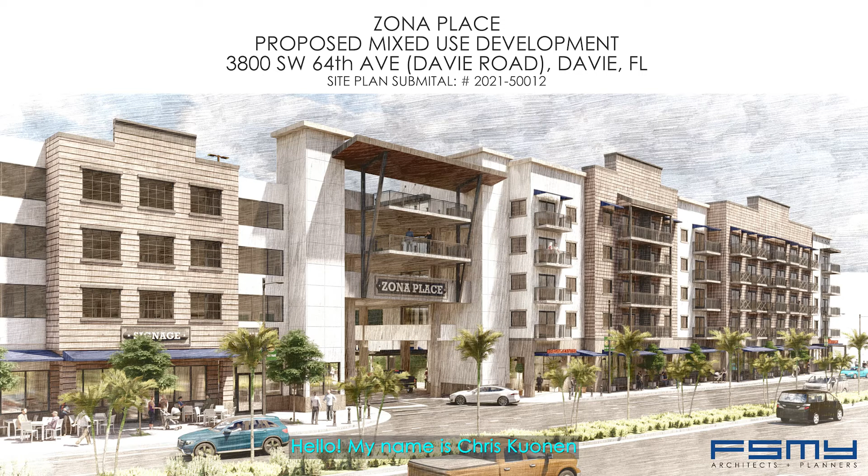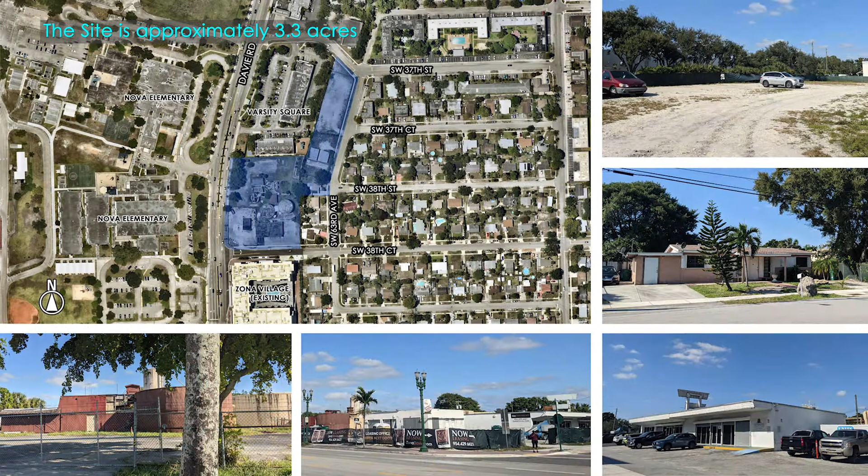The following project is designed for Ceiba Group for their site plan application request to the town of Davie to build a new mixed-use development on Davie Road. Located in the town of Davie's Regional Activity Center zoning district, the project fronts a transit-oriented street and is also in the Western Design Theme District. The department review number is 2021-50012. The project team includes FSMY Architects, Pillar Consultants for Civil Engineering, Traffic and Landscape, and LeMay Escobar for Interior Design. The site is approximately 3.3 acres and is located on the east side of Davie Road between Southwest 37th Street and Southwest 38th Court.

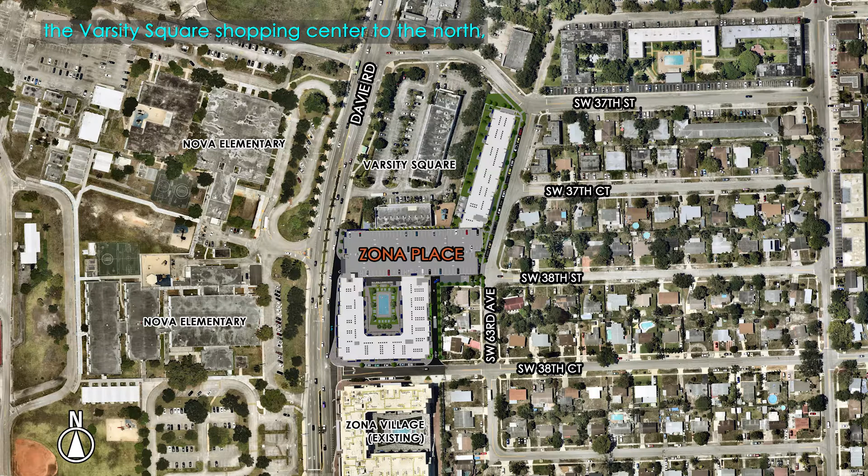The southern and middle portions of the site currently contain some structures, including the town's decommissioned sewage treatment plant, a one-story commercial building, a single-family residence, and two metal storage buildings, which are all scheduled for demolition and removal. The northern portion of the site is currently vacant. The property is bounded by the Zona Village mixed-use development to the south, Nova Elementary and the South Florida Education Center to the west, the Varsity Square Shopping Center to the north, and a single-family residential neighborhood to the east.

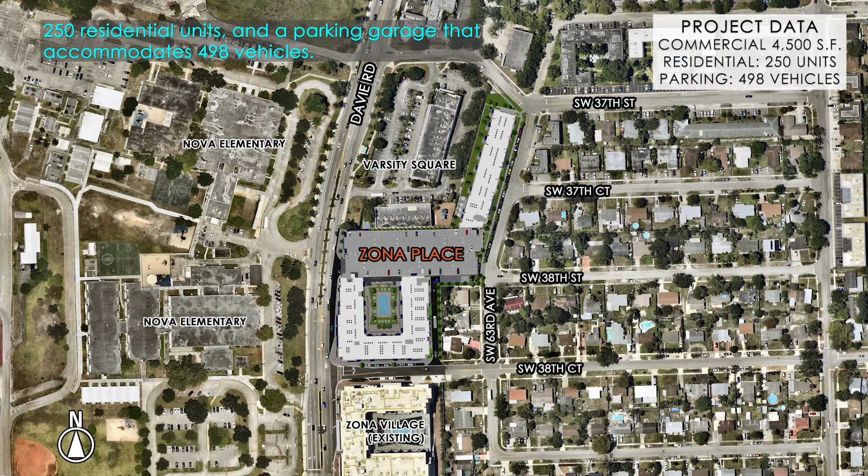The proposed Zona Place mixed-use development includes 4,500 square feet of restaurant and retail space, 250 residential units, and a parking garage that accommodates 498 vehicles. Designed as three interconnected buildings, Building A contains 173 apartments, resident amenities, and a central courtyard pool. In the middle is the parking garage with commercial retail facing Davie Road, and to the north is Building B, a residential building with 77 apartments and outdoor amenities.

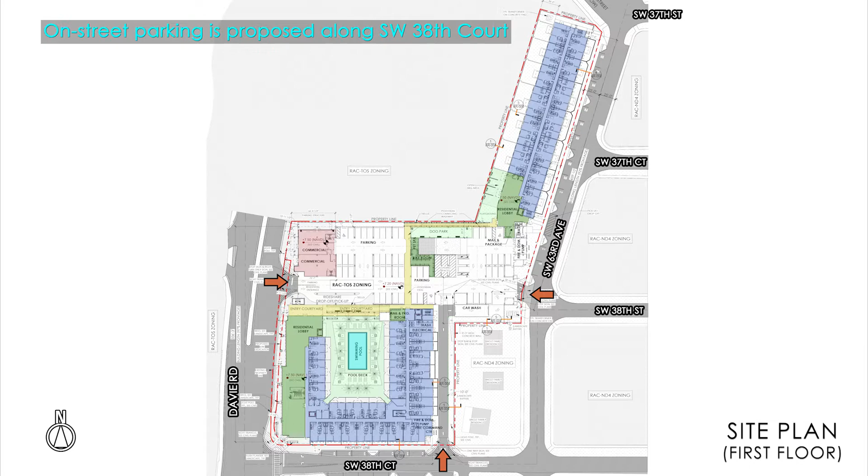A vehicular driveway access and turn lane is proposed from northbound Davie Road into the west entrance of the parking garage. A second driveway access is proposed on Southwest 63rd Avenue into the east entrance of the parking garage, and a service alley is proposed on Southwest 38th Court. On-street parking is proposed along Southwest 38th Court and along Southwest 63rd Avenue.

Building A contains resident amenities including a lobby, clubhouse, and gym along the west side with large storefront windows facing Davie Road. Apartments make up the remainder of the first floor. Commercial retail spaces lie on the west side of the parking garage fronting Davie Road. The west garage entrance leads to a motor court pull-off area inside the garage. To the north and east is parking for the commercial tenants.

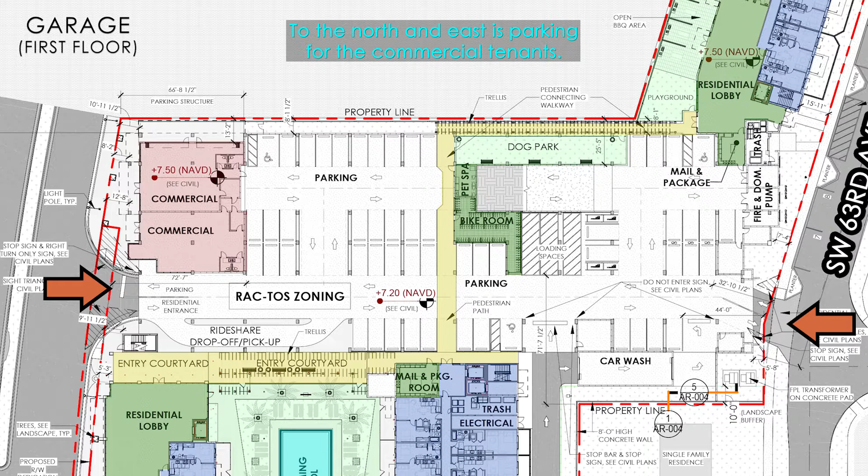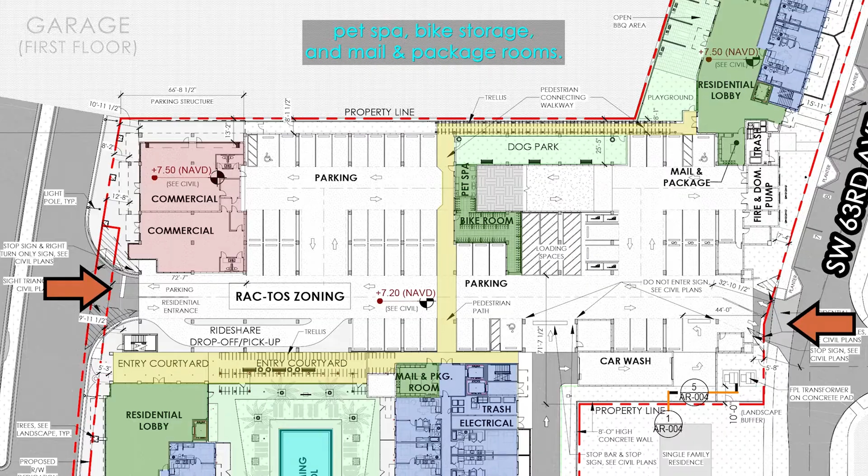Electric vehicle charging stations are also provided. Trash service and dedicated loading areas are inside the garage, concealed from the neighborhood and public right-of-way. A pedestrian path inside the garage, also known as the Yellow Brick Road, connects the two residential buildings with lush landscaping and covered trellises at each end. Resident amenities along the path include a dog park, pet spa, bike storage, and mail and package rooms. Building B amenities are located at the south end and include an outdoor playground and barbecue area. Ground floor apartments have large private courtyards.

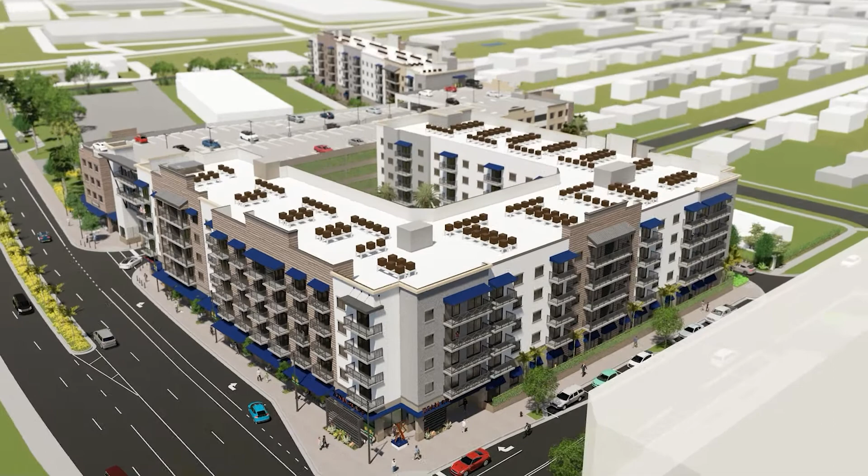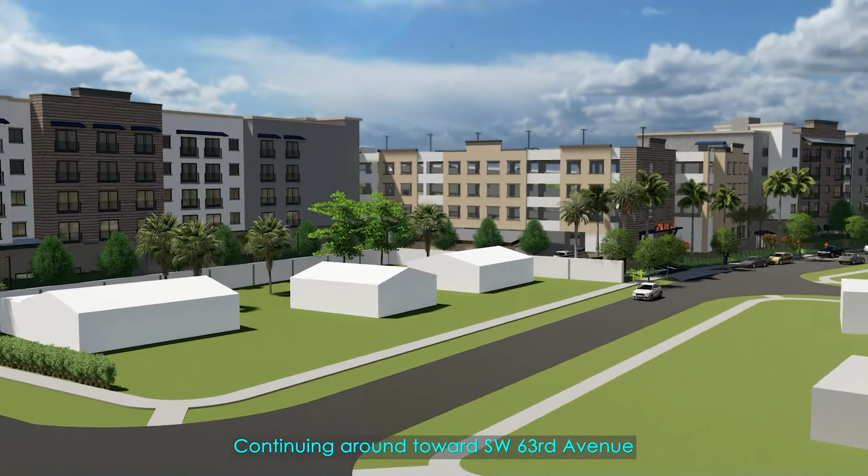Looking north, we see Davie Road and Nova Elementary to the left. The residential building A is in the foreground, with the parking garage just beyond. Continuing around towards Southwest 63rd Avenue is the east entrance to the parking garage and east side of the residential building B.

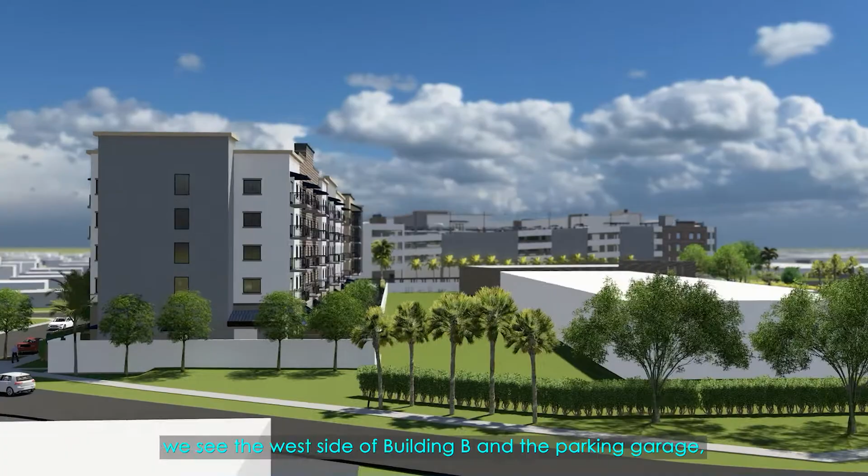Moving back towards Davie Road, we see the west side of Building B and the parking garage as they face Varsity Square. And finally, heading south down Davie Road, we approach the west side of the project with the retail and garage on the left and the residential Building A on the right.

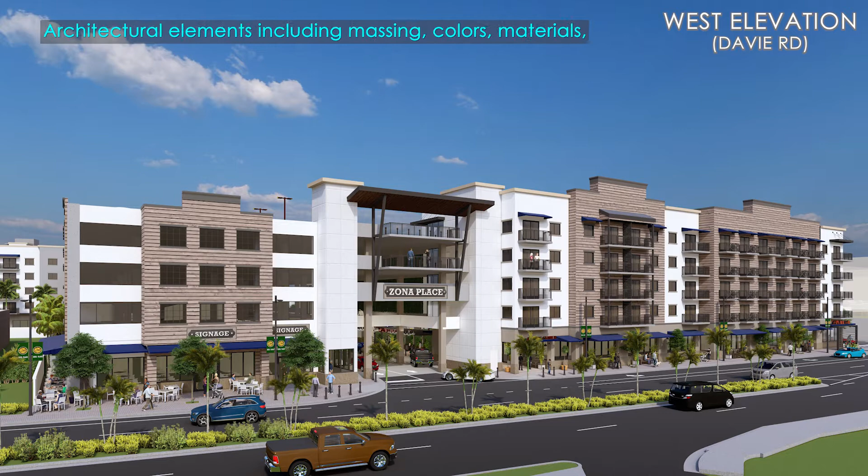In keeping with the requirements of the Western Design District, architectural elements including massing, colors, materials, and textures are used on the facades to evoke the decorative false fronts of Western buildings. Wall materials are heavier at the base with darker paints and simulated finishes. They lighten in texture and color as they move up the elevation. The tops of facades end in tall step parapets capped with cornices which also serve to screen the flat roofs and mechanical equipment beyond. Decorative shed roofs are finished in a standing seam metal roof type material.

Wide public sidewalks line the western edge of the property along Davie Road, creating pedestrian connectivity to the adjacent properties north and south, and providing access to the commercial tenant spaces and pedestrian entry courtyards within the project. The west side of the property is further enhanced by various street trees, and sidewalk and street lighting improvements are consistent with the newly developed projects to the south.

In addition to our request for site plan approval, we are also asking for a variance request. The zoning for the site, RIC-ND4, on a transit-oriented street, allows for an incentivized maximum of 4 stories and 55 feet in height. We comply with the maximum height allowance of 53 foot 8 inches, but an additional floor for a total of 5 stories is needed to make this a viable project.

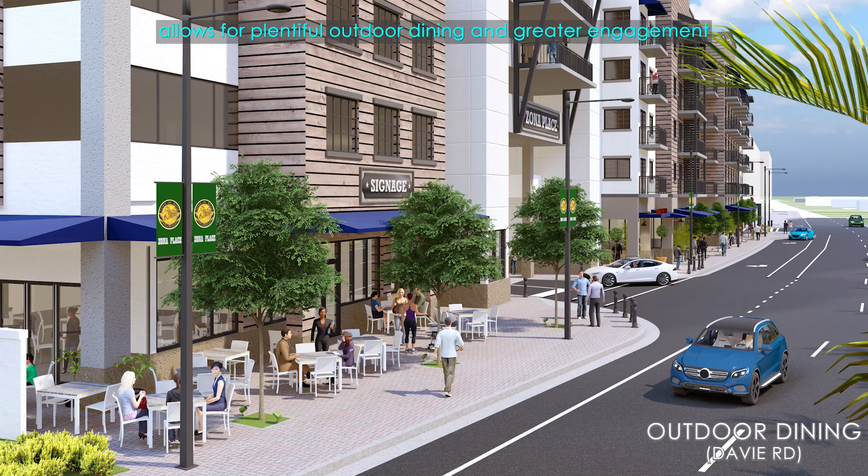The additional sidewalk width at this portion of the site allows for plentiful outdoor dining and greater engagement with the street-level pedestrian experience. Shade trees, street lighting, and deep awnings further enhance this experience.

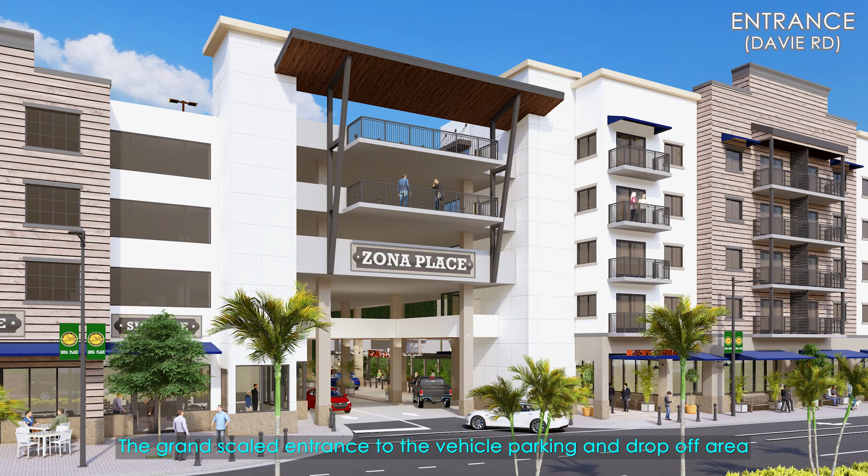The grand scaled entrance to the vehicle parking and drop off area is centered between the retail and residential uses and is adjacent to the main pedestrian courtyard and lobby entrance to its right. Large ground floor storefront windows along Davie Road maximize indoor outdoor connectivity to create an inviting environment for patrons and serve to activate the building from the street.

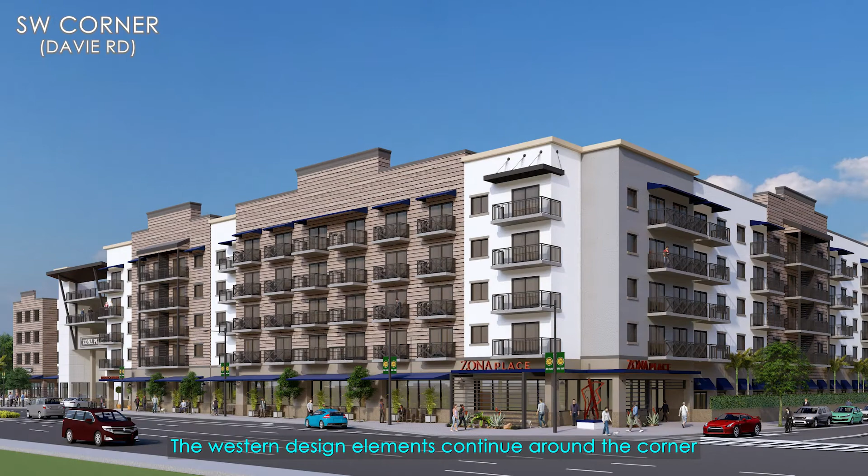The western design elements continue around the corner to the south facade of the building. Some of these design elements also occur on the Zona Village project to the south, creating a dialogue and continuity between the two projects. Resident balconies along the west and south facades help to enliven and bring movement to the upper floors of the building.

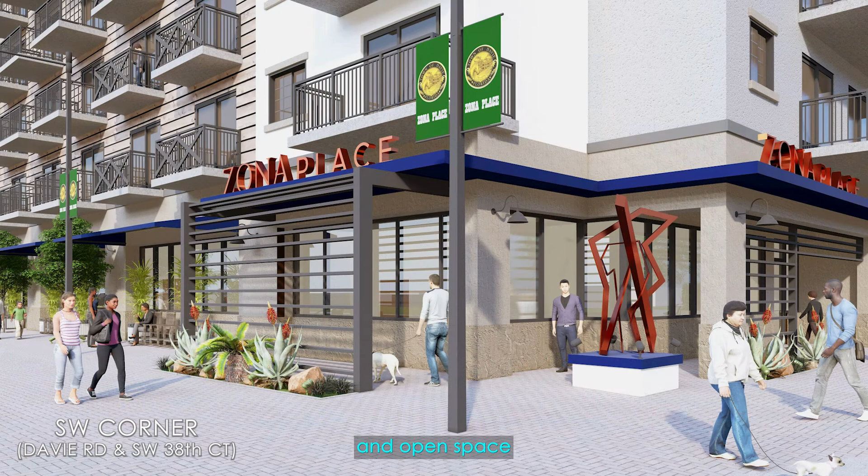Large ground floor storefront glass wraps this corner of the building and continues east along the public corridor. There's additional sidewalk width and open space at this corner of the project where Davie Road and Southwest 38th Court intersect. Unique overhang elements with project signage, wood screen walls, and additional landscaping create an enhanced covered pedestrian experience and unique design statement at this prominent corner of the project.

Space is also allocated here for future public art. New on-street parking is proposed along Southwest 38th Court.

Wide public sidewalks continue from the corner of Davie Road, connecting to the existing sidewalks in the adjacent residential neighborhood. An 8-foot-high concrete wall and a densely planted landscape buffer enhance the screening of our project from our neighbors to the east. The resident parking garage entrance seen on the left is surrounded by lush landscaping.

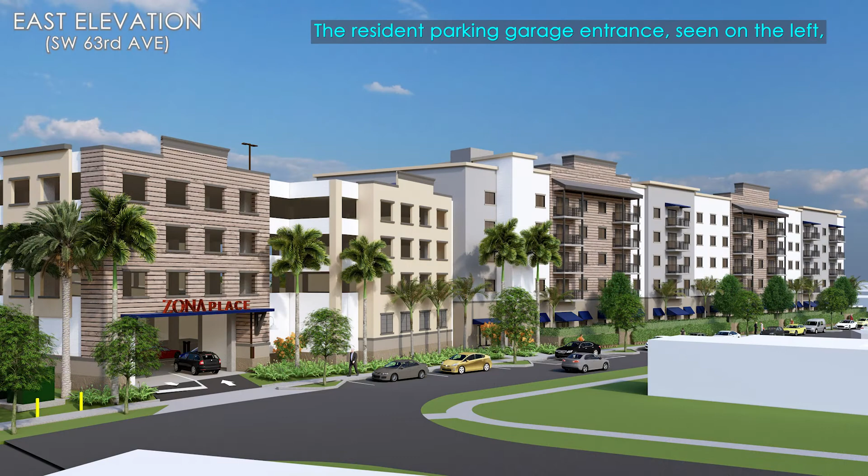Vehicles inside the parking garage are concealed by continuous screening, including solid walls with small window-like openings for ventilation. The Western-themed design elements are also used on residential building B, including articulated and varied facades, simulated wood siding, step parapets, enhanced cornice moldings, and raised banding.

Units on the ground floor with their large private courtyards and additional ceiling height are adorned with fabric awnings over doors and windows. This building is set back an additional distance from the street to provide more separation from our neighbors to the east. An enlarged and densely planted landscape area is planned in this extra space, which will beautify the area and provide a softening buffer from the single-family residential properties.

Wide public sidewalks lining the eastern edge of the property provide a pedestrian connection to the adjacent properties north and south and are lined with abundant street and shade trees. Plentiful on-street parking is proposed here along Southwest 63rd Avenue.

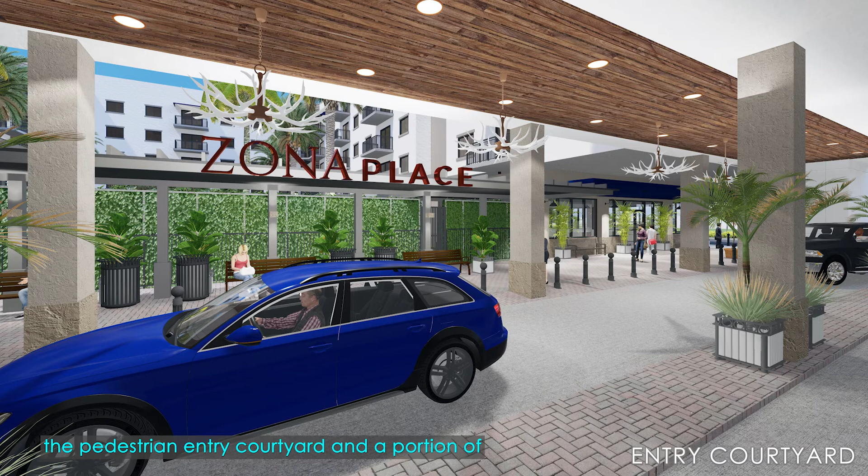The vehicle motor court inside the parking garage joins with the pedestrian entry courtyard and a portion of the Yellow Brick Road pedestrian path. Ample covered seating is proposed along the drop-off and pickup area. It's an open breezeway with lots of natural light and ventilation while also providing ample screening to the pool deck beyond. The pedestrian entrance to the lobby of Building A is visible in the distance.

These elements come together to create a grand entrance experience to the Zona Place mixed-use development.